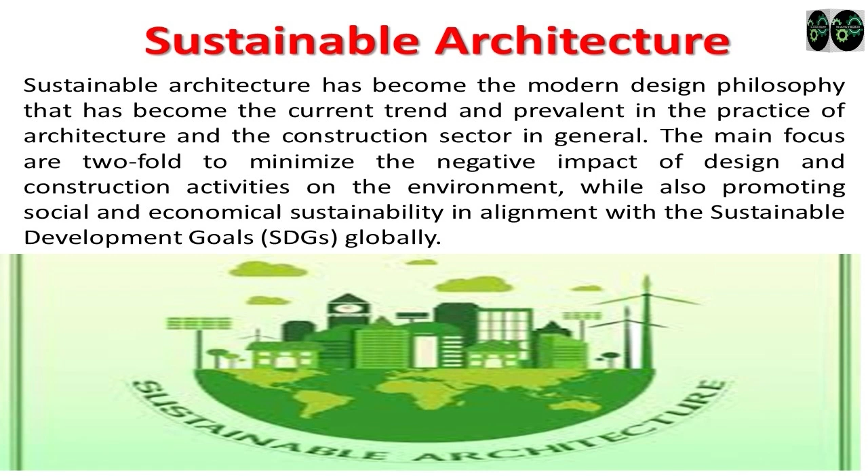Now we're looking at the sustainable development goals. There are 17 of them, and we're saying that with architecture, we'll be able to solve these problems, because when we have sustainable buildings, we'll be able to solve health problems and human well-being, because the building will relate to what the requirements for humans are in terms of ventilation, air, and lighting for walking and things like that.

And you'll be able to have environments that are nature-based, with vegetation planted all around the buildings. They help even in air circulation, and they proffer buffers to buildings where we have storms and things like that.

But when you plan and have sustainable consciousness, when you are designing not just the building but the environment, you'll be able to achieve that. And you'll be able to also have natural zero carbon electricity when you harvest sunlight, to be able to use it within your building to function, and other functions that will run in the building. So those are the kind of things we look at.

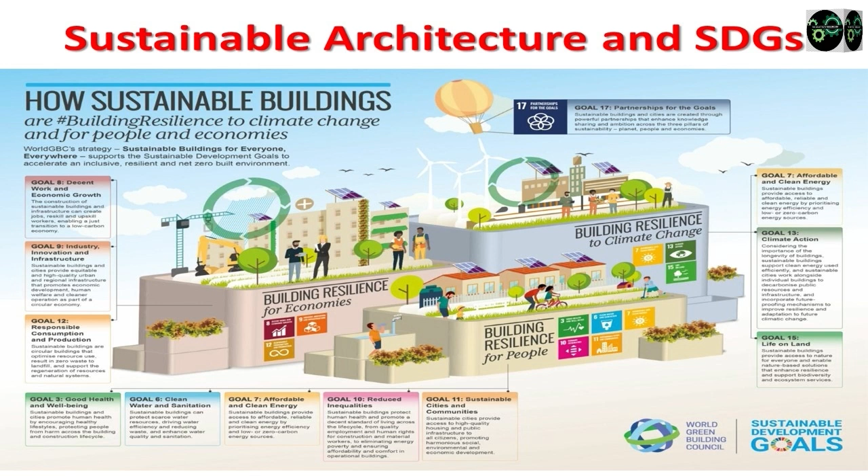So this is just to show us an example of what a sustainable building can do. Like I said earlier, it harvests sunlight, it harvests rainfall to stop wastages. You recycle this water, you have environments that are well planned, and then they are green.

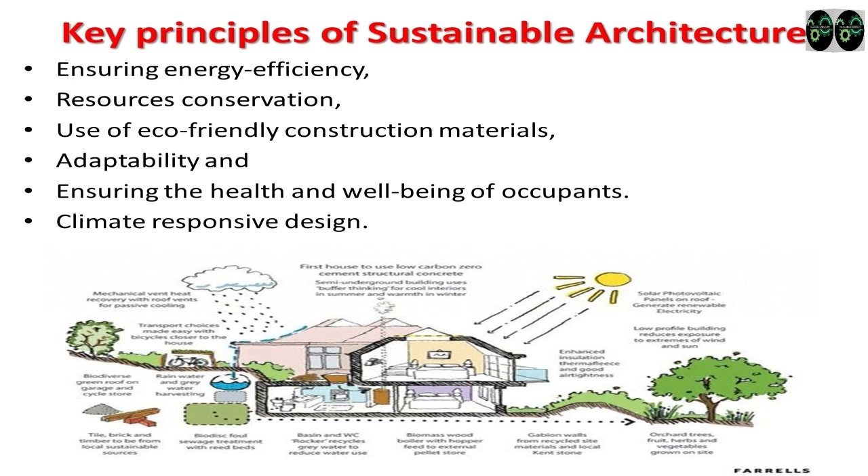We also have buffers, all provided for, because in your consciousness during design, you are able to think of sustainability in all the decisions you are taking. Next slide, please.

So we said one of the things you look at is energy efficiency and renewable energy. So if you are thinking this while designing, you'll be able to provide the strategies through usage of things like solar and wind energy, which you harvest, and then, of course, to provide clean energy so that you reduce the reliance on non-renewable resources.

And of course, what are the innovations? You have energy-efficient appliances, lighting, cooling systems, and other appliances that are using low consumption of carbon. And of course, they will emit less carbon into the atmosphere, so that gives us a cleaner environment to live in.

Next slide, please. So we said innovations come out of this. And when we think of them at the stage of our drawings, we're able to assess the environment, we're able to assess the requirements, we're able to input the data.

Then we need building information modeling. That's what's in now, and it's part of, and it will form an integral part of our sustainable design, and of course construction, and that will help us to have efficient construction, development, infrastructure, and whatever you have.

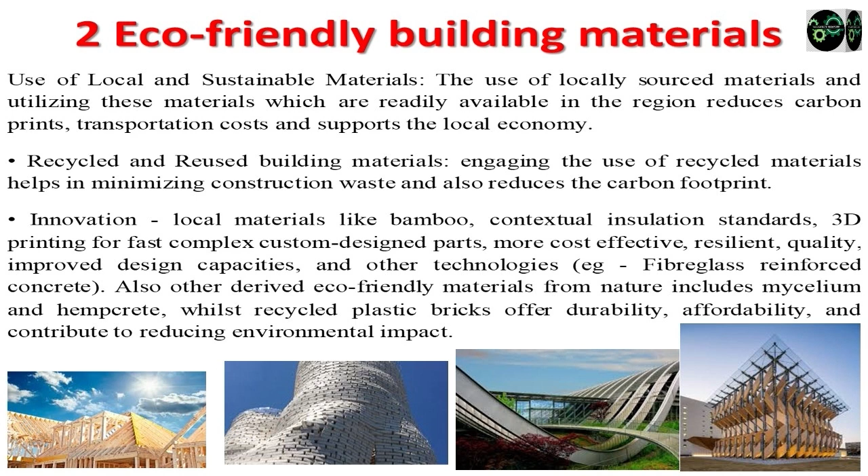Usually, maybe at the beginning, you may think they are expensive, but over time you discover that they are cost-effective and they are affordable and environmentally friendly. Next slide.

So, climate resilient design takes advantage of design strategies, like passive design. It's fairly common that you're looking at servicing a hall like this instead of using the fan. You allow air, you provide openings at the top where hot air easily goes off and the cooler air remains within, depending on what you want to achieve at what time of the day. If it is in the morning, you want it a little warm, and during the day you want it a little cool, so you're able to adjust to the solutions you need.

And so these are usually nature-based, like integrating green roofs, and rain gardens, usually at the top of your roofs, to improve air quality and provide less waste, harness what you get from nature and improve your living.

So you kind of add value to your properties, smart buildings, technology, green building certifications. We're not so much into certifications, and it's not helping, where every material that you use, your structure certified - we'll be able to fight quackery if we're able to do that, because you will not even take your drawings or your design anywhere without it being certified. Countries that are well developed, into certification, you cannot do such things in Canada, Australia, because every aspect of the structures, even light bulbs that you fit in, must be certified to a level that it provides for that structure.

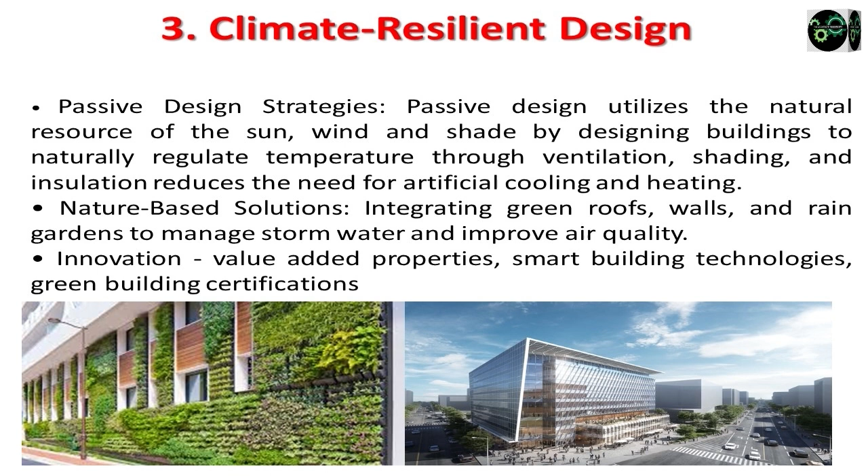So whatever you do, data information is very important. And if data information is very important, it means that we need to be all inclusive in a community. Sometimes you see community meetings where only old people meet and decide on certain things, and you build a structure and discover only old people come there, the young people are not there. Or you have a community meeting where only young people are there, and they will tell you, well, this is for children, so we are not part of it because it doesn't address whatever needs they have.

And then you go to communities, especially communities like University of Jos, you go to most of these lecture halls, and you discover the ramps are usually afterthoughts, they are not part of the design. Or you are climbing a step, and you discover they have different height levels. You're used to a building that has well-defined, standardized risers and treads, where you know you don't have to look at the steps, you just move. Try it here, I'm sure you'll lose a tooth.

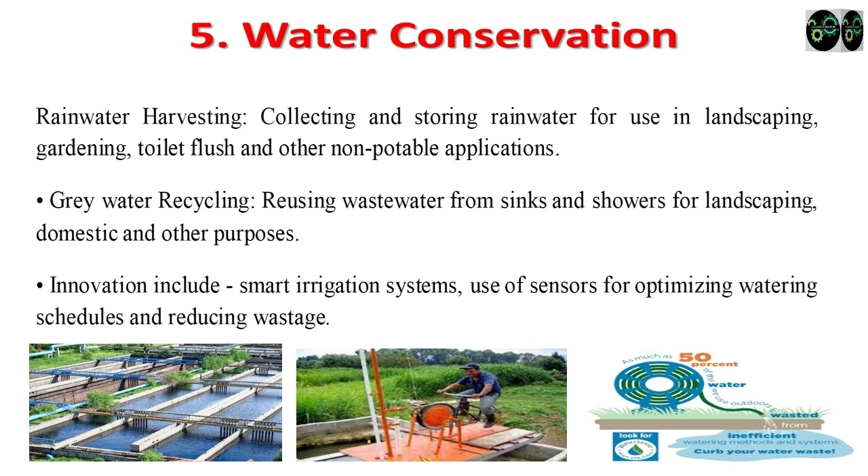Once you have something that is innovative, you discover that it is not in itself innovative, it will also create other innovations. Because if you are thinking of sprinklers, somebody will say, oh, what about sensors? Do we just use them, or maybe we can regulate at what time of the day and what amount of water we need at a particular time. So those are the kind of innovations that are derived for such things.

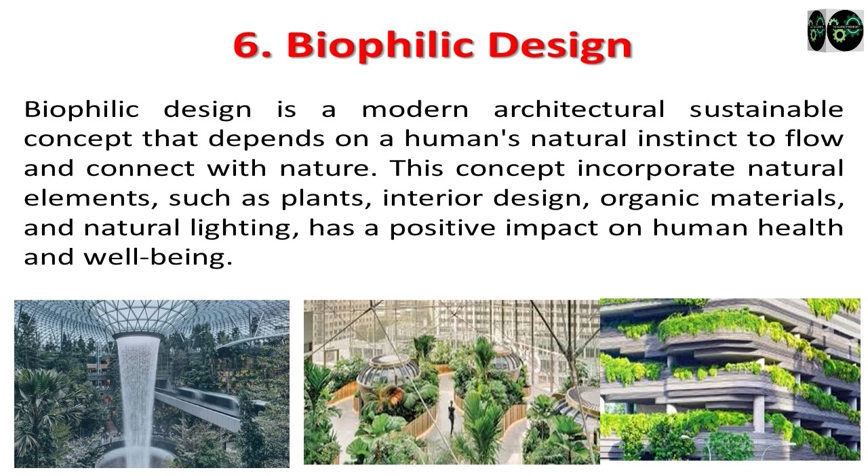So we also engage adaptive reuse of materials, so they're not wasted. You transform buildings from whatever old functions or uses they have, and you preserve culture, and of course you make spaces adaptable. Like in this theater, we have fixed chairs, so this theater is not likely going to be adaptive to other uses, except a setting that fits this sitting arrangement. So innovations usually involve fabrications and modular construction. In modular construction, you have parts built elsewhere and then assembled in one place to your needs and requirements.

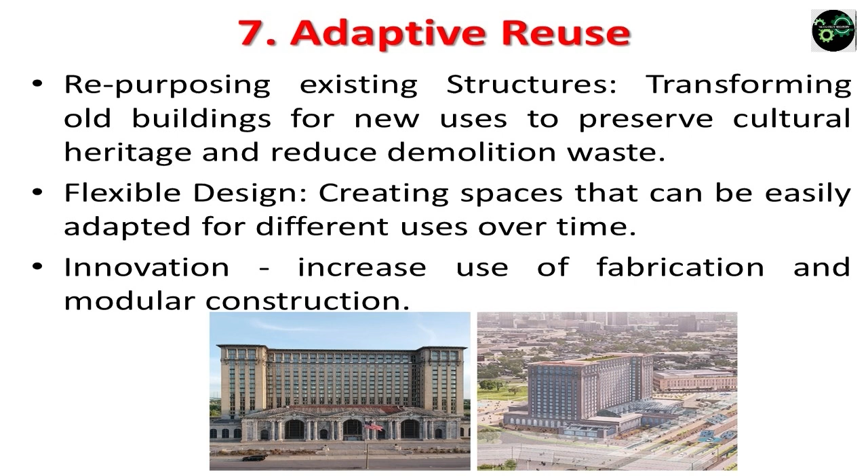Capacity building, just like we're here today - we need to talk about what is required, what should be done, what are those things important and necessary. We don't train our students because we want them to practice architecture only in Nigeria. We train students so they can be ambassadors wherever they are in the world, because whatever they are learning shouldn't be just good enough for us. We have to include the context of other regions, not just African or Nigerian context, so a student can go elsewhere and continue his program without feeling disadvantaged - the internationalization of our education curriculum. We have to upgrade our curriculum to suit what is necessary, to suit entrepreneurial skills and things like that.

Mentorship is very important in our studios. That's why we encourage that students also have engaging and interacting times with their studio mentors.

So this is all that we're talking about. We say we need materials that are sustainable, energy awareness, innovation, sustainability, energy from solar and all that. And I think that wraps it up. The innovations are doable, they are important, they are necessary. Without innovations, you will not move ahead, and this is what drives education. If it is not innovative, it wouldn't drive.